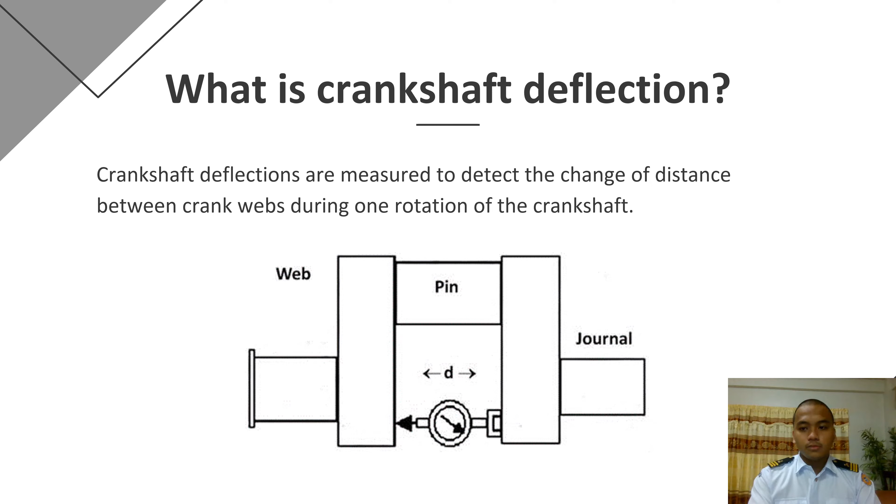Next, when do we do it? Good maintenance requires periodically measuring the crankshaft deflection, which ensures that the shaft alignment is within allowable limits. Generally, it should be done regularly in order to detect any misalignment of the engine's crankshaft and wearing of the main bearings that support the crankshaft to allow smooth operation during engine operation.

In other instances, it should be performed once or twice a year under normal running conditions, after replacing the main bearing shell, and again after around 100 hours, or if there are any signs of damaged bearings or increased bearing temperatures.

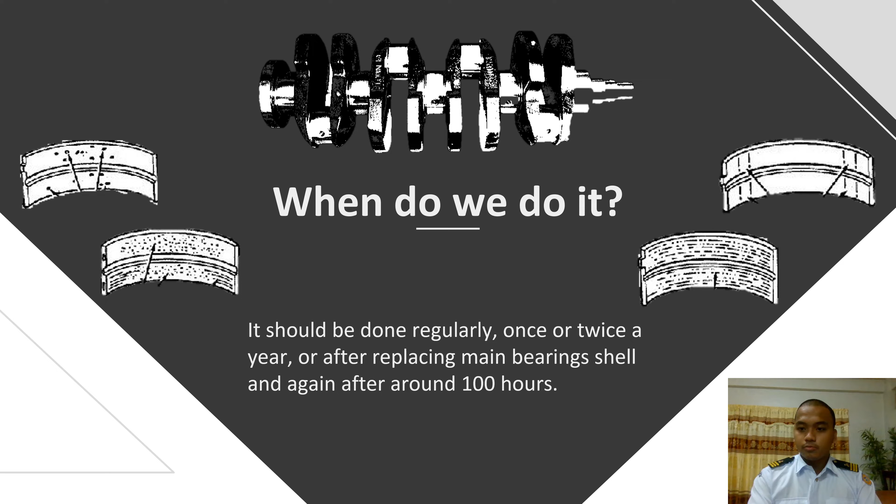So I am John James P. Espinosa. So in what emergency situation should we apply crankshaft deflection? In emergency situations such as ship grounding or collision, as there are possibilities where the propeller or hull affected the shaft and main bearings, causing crankshaft deflection, which requires immediate attention to prevent major damages.

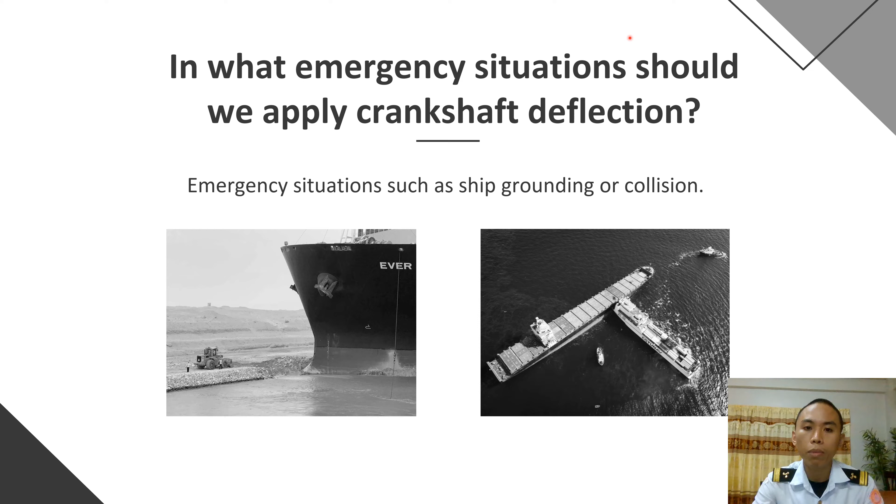So where is it done? Crankshaft deflections should be done where the ship is afloat, anchored in calm weather, and under the same temperature and loaded condition, as the measurements can be affected by the engine temperature and vessel load condition, and lastly ambient air and water temperature.

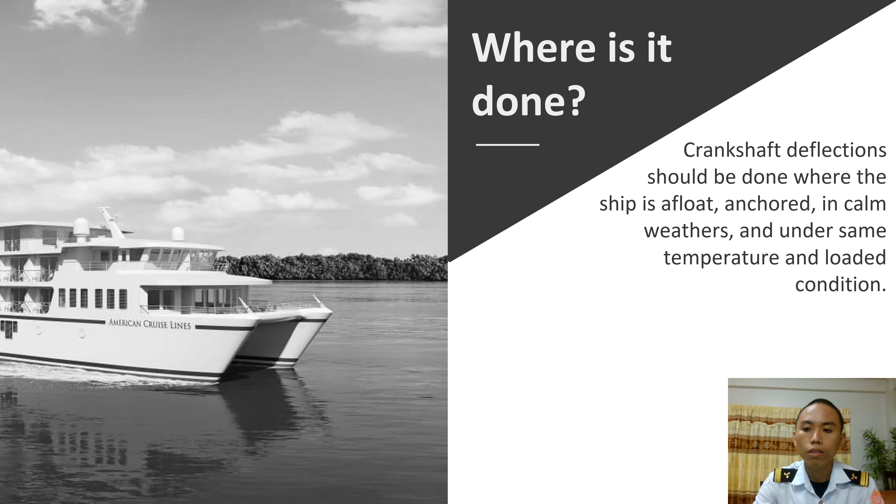So good day, sir. I am Banhawan Yuzel I. So how is it done? To perform crankshaft deflection measurements, the crew must secure the necessary precautions and preparations such as the toolbox meeting, checking of the ship's manufacturer's manual, enclosed space entry permit for authorized operation, stopping the main engine to allow cooling, and locking and tagging the starting mechanisms to increase visibility, awareness, and traceability.

Start air supply and lube oil pump must then be shut off as the operator is going to work in the crankcase doors. Open indicator cocks in order to depressurize. And then open the crankcase to allow ventilation before entry and engage the turning gear to control the crankshaft rotation.

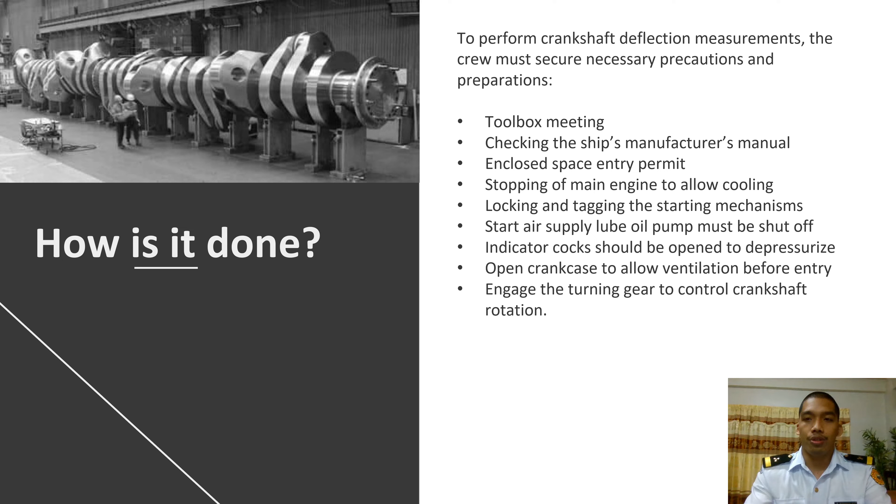Next is measuring the crankshaft deflection. Measure first with the piston near the bottom dead center, precisely right at the beginning of the compression stroke. There are markings where the dial gauge needs to be placed, which is actually in the crank throw and opposite the crank pin, and set it to 0 as soon as the dial gauge is in position. Once it is set up, the crankshaft will be turned using the turning gear and the readings will be taken.

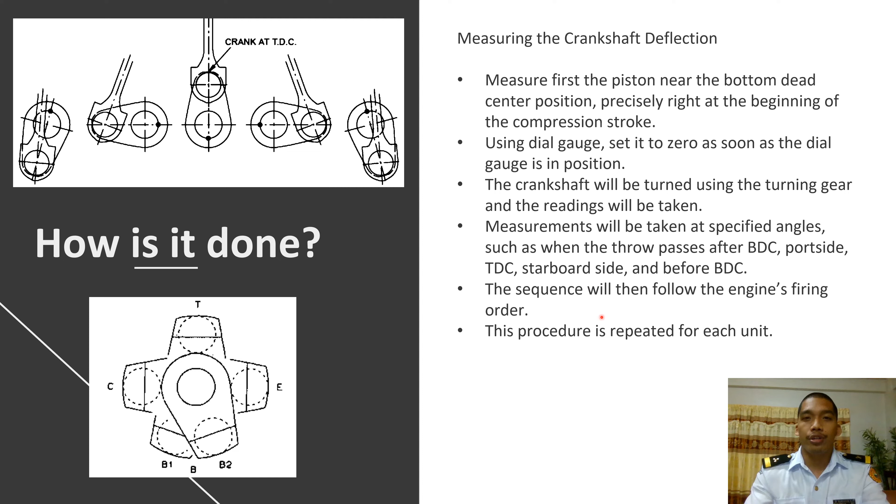Measurements will be taken at specified angles, such as when the throw passes the BDC, the bottom dead center, the port side, the top dead center, the starboard side, and before the BDC. So it is like a regular pentagon. A positive reading means that the crank throw is opening, while a negative one means compression or closing of the crank throw. The sequence will then follow the engine's firing order, and the procedures are repeated for each unit.

Once all the units have been measured, the values will be calculated to determine the deflection in each of them, and are calculated from the vertical and horizontal plane. If the deflection readings exceed the allowable limits of the manufacturer's manual, it points to worn out or damaged bearings. However, the main bearings will normally not be damaged unless there is an underlying reason, such as severe engine vibration or loss of lubrication.

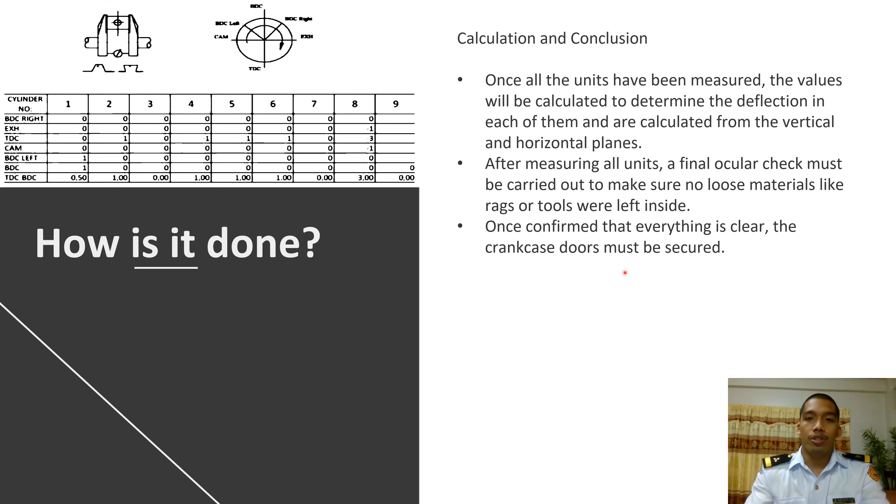Then, after measuring all units, the final ocular check must be carried out to make sure there are no loose materials such as rags or tools that were left inside. And once confirmed that everything is clear, the crankcase doors must be secured.

So why do we have to do it? The essence of crankshaft deflection readings is that it helps in early diagnosis and prevents heavy damage from occurring, including crankcase explosions. It helps to determine whether the crankshaft is efficient in operation with optimal bearing alignments and in good condition. By finding out exceeded limits of measurements, maintenance and repair operations are to be carried out immediately to ensure the safe working operation of the engine.

This will prevent potential breakages, cracks, or damages and reduce the costs and time of operation before it becomes a major problem. Conclusively, crankshaft deflection measurement is vital for the safe operation of the ship and the lives of the crew.